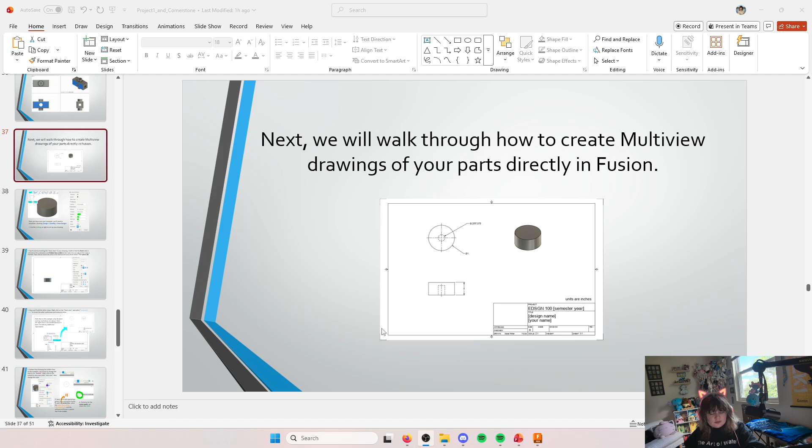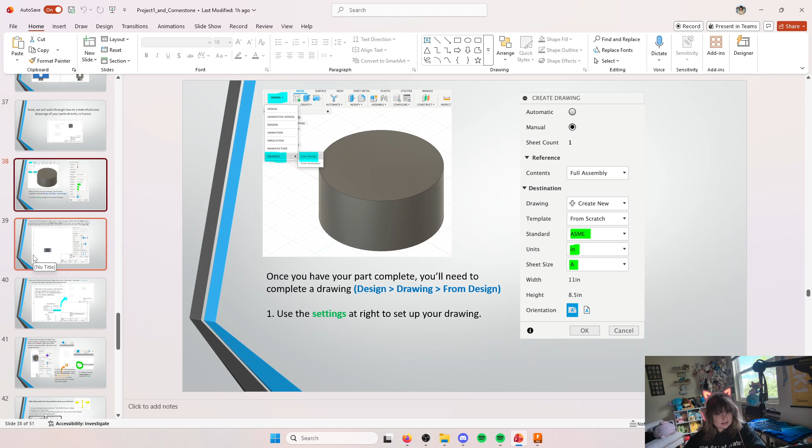Next, let's go ahead and create a Fusion Multiview drawing. You probably learned how to manually do multi-view drawings through actual manual sketching. It's an important skill, but it takes a lot of time. So sometimes instead, we want to use our digital tools to create multi-view drawings. There are slides on this you've likely gone over in class, but this tutorial might still help you revisit it. Let's walk through it.

So we have our object that we created in our original walkthrough, and let's say I want to go ahead and create a drawing of this. We can create the multi-views. We want to see everything. To do that, you want to go over to Design, then Drawing from Design.

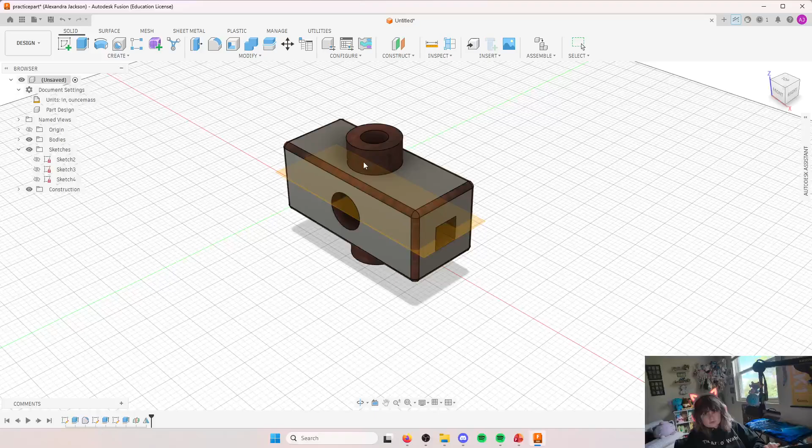First, I have to save it. Let's just go ahead and save it as something, making sure you know where it is too. This menu will come up to create your drawing, where you can double check all your settings. We want to use the ASME standard, and the units you want to use - for me, that's inches. I'm going to change the sheet size to A, just for regular printer paper size, and click OK.

Sometimes it takes about 8 years to load into a drawing, depending on the computer you have. Oh my God, AI assistant, please leave me alone. Please, I'm begging you to leave me alone.

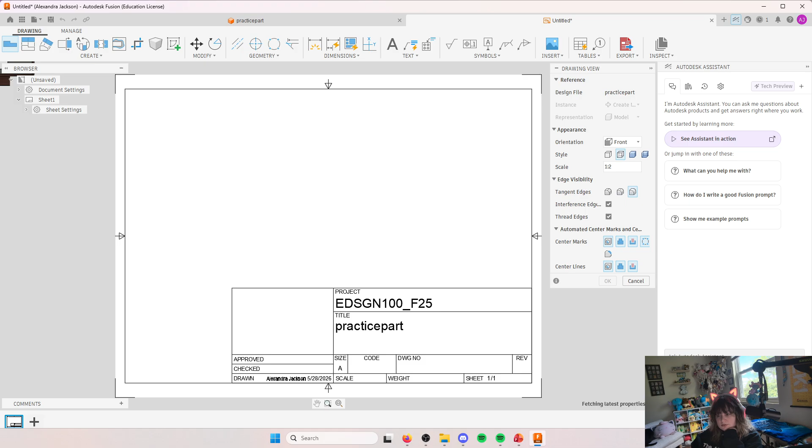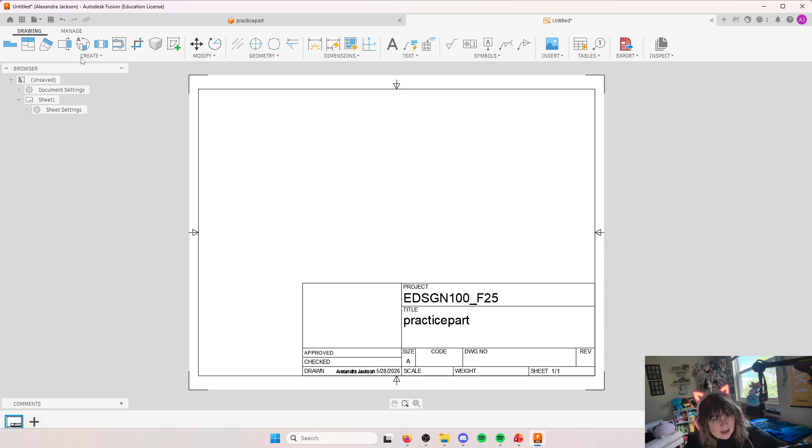Okay, and then it shows you your drawing sheet. Now, because I got angry at the AI assistant, I don't have the actual part attached to my mouse. Usually when you come in, it's already holding the part and you just have to drag it. So we will have to do it manually, but that's okay because everything you need is right here. Create base view - this is going to show us our front side view.

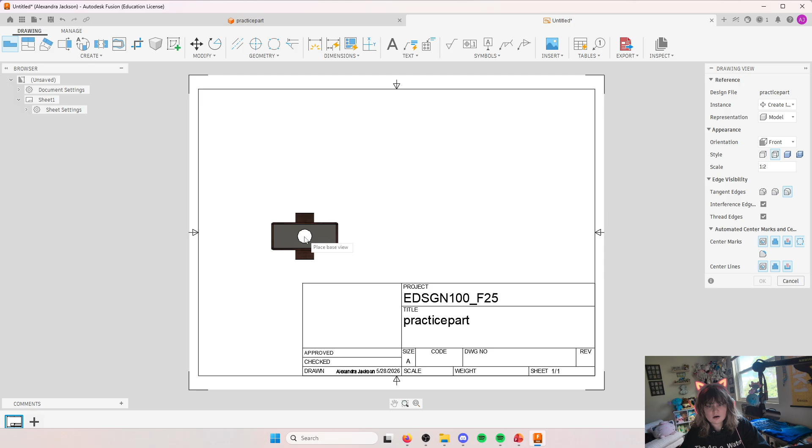So when I have it, I'm not holding the right click or left click down or anything, I'm just dragging it around. And since this is the front view, I want to place it around the bottom right corner-ish - bottom left corner, excuse me. I guess I don't know my left and rights today.

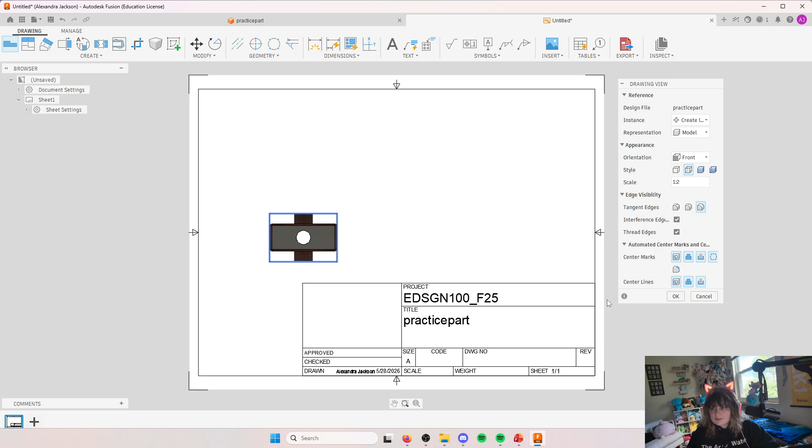In our multi-view drawings, as you remember, our drawings are not shaded. So you want to make sure you are selecting the style you want, with visible and hidden edges. You can select different styles too, but you want to make sure you have that so that when you add dimensions, you can see all the lines, hidden lines, and things. So if we click OK, that's what we see.

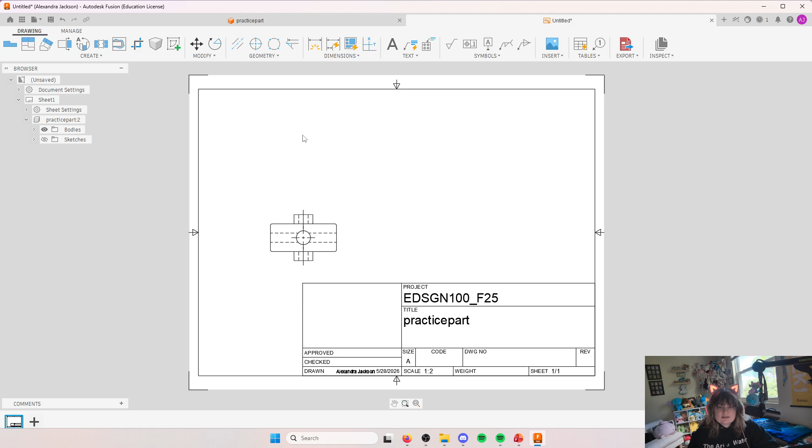We see center marks and lines. Again, if you bring up the drawing view by double clicking, you can select things like center lines, round cuts, whatever you want to see. So it looks great, but now we also need to see the top view and the right side view, as well as our isometric, right? It's important that we see the whole 3-view thing.

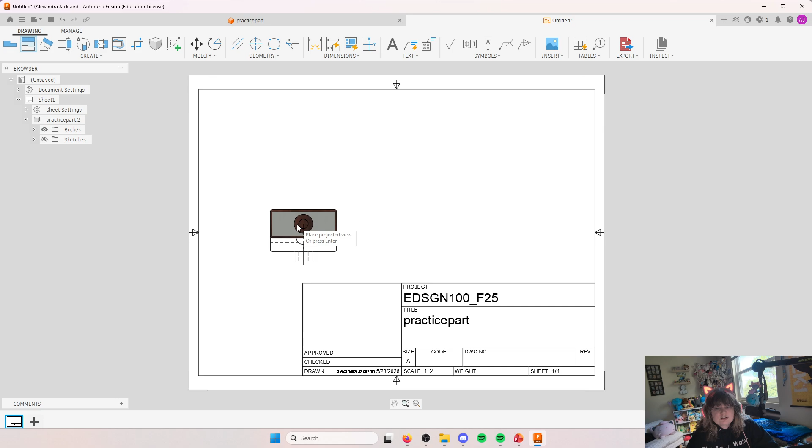If you right click it, you'll see this projected view here, or you can select projected view, or press P on your keyboard. When you press P, you go into projected view - you'll first have to select a parent view, which is your base view. Then as you drag it around, you can place different views. So let's place our right side view, place our isometric view, and place our top view, then click escape or enter, and that will be there.

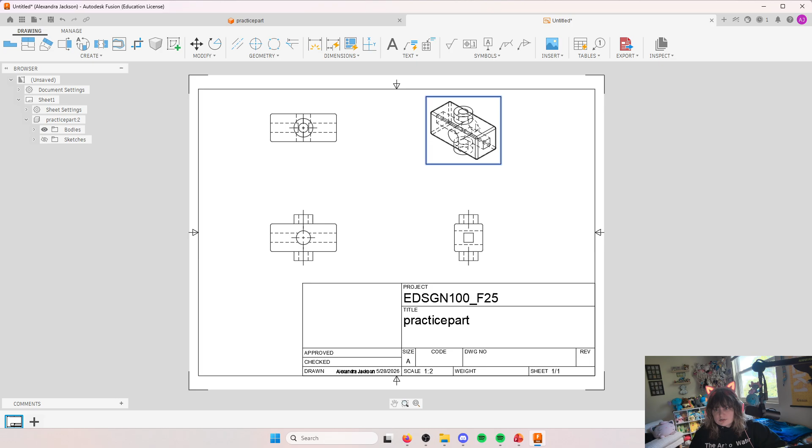So great, now we've got our views. We do want to make sure this one is shaded, because we want our isometric view to be shaded. You can move it however you like, but you do that by double clicking and changing the settings. So perfect, we're in a pretty good spot.

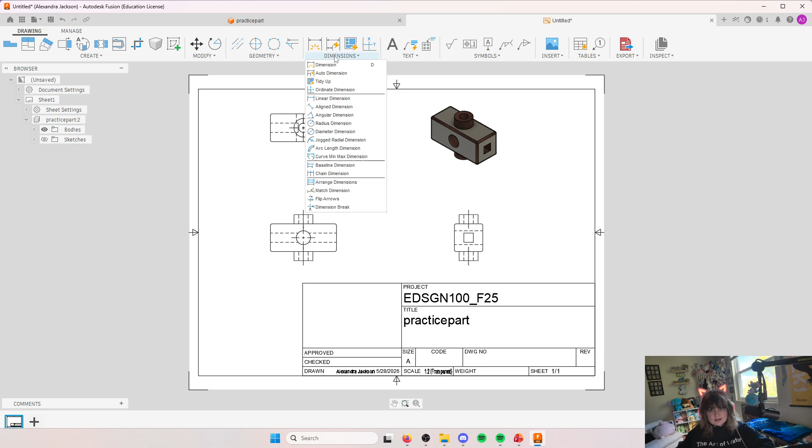Next up, we need to make sure we are adding our dimensions. You can do that manually of course - you've got your dimensions. For more complicated things, and since you're making this from a part that's already well defined, you can use the auto dimension tool. You just have to make sure you're moving things around for them to make sense.

So if we do that here, we can see this 3.5 is down here, and we want it to be in a different spot, so let's move that up. Let's move this over here. Let's move this - fillet radius, that's what that is. Move that over here.

We've got our 0.5, 0.1, our radius again. Here, this is 1.5. Okay, great. So we've got what we need in terms of our dimensions.

This looks good. Now we're missing a couple things. Remember, we want to make sure we have lines for these holes that go through. And we do, this is showing that we have a line here, and we have a line here. We've got lines for our circles.

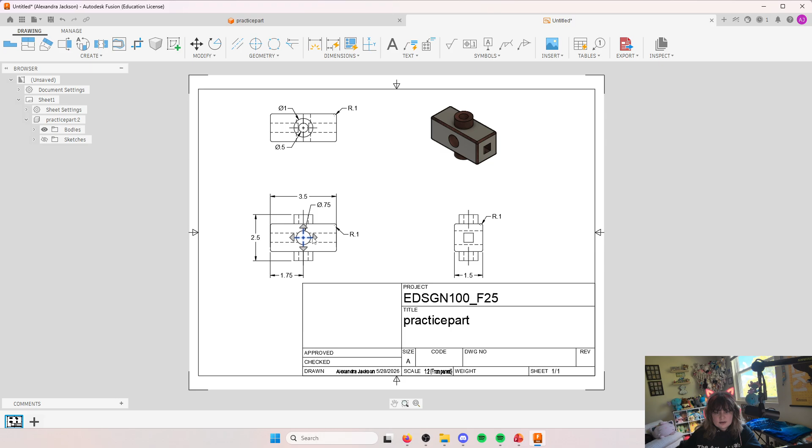But the proper notation of these lines is like dotted lines, and these are solid lines.

This is just an annoying thing that can happen with smaller looking things. You can actually do that in document settings and change your line width group, and just play with your line type scale, make it a little bit smaller. I just kind of guessed here, like 0.5 seems to have worked pretty well for this line and this bottom line here, as well as over here.

Looks good. If you needed to add more, let's go ahead and go for a center line. We want a center line here, for example. We want one here, and maybe we want one here. I don't think we actually do, but let's just add them for the sake of adding them so I can show you how the feature works.

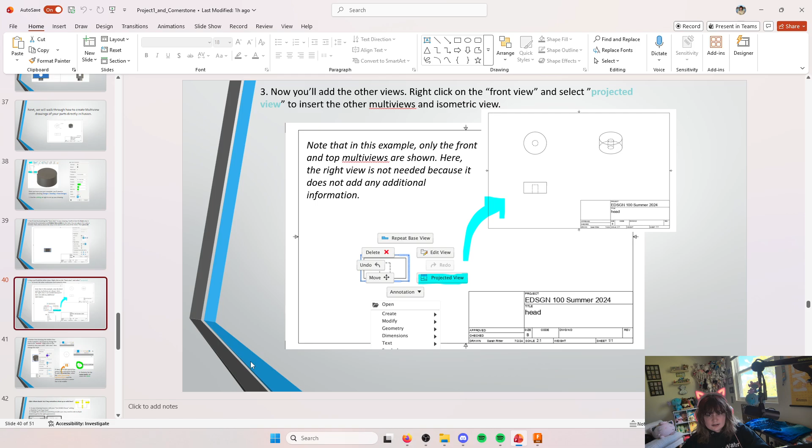But there you go. So once you've got all of your features added, let's make sure I've covered everything here with line type scale. All right, we've also got this depth feature.

On the top view here, we know that there is a depth that this comes out, and we can figure out the distance between here and here because we have this distance. But we also have to note that it's a depth. It's not a complete hole through the center. It's a depth that only goes in a certain amount.

I think it was 0.5 inches. You'd have to double check. But there is a way to create a depth symbol.

What you want to do is you can just create it right here in the diameter dimension, which only this 0.5 one is going in. But if you double click that dimension and go in over here where it says insert symbol, you can add that depth symbol and add that it's 0.25 inches.

Now we know that this part, like this middle circle here, is 0.5 inches in diameter, but it also goes in 0.25 inches, or whatever it was. I think it was actually 0.5. You'd have to double check.

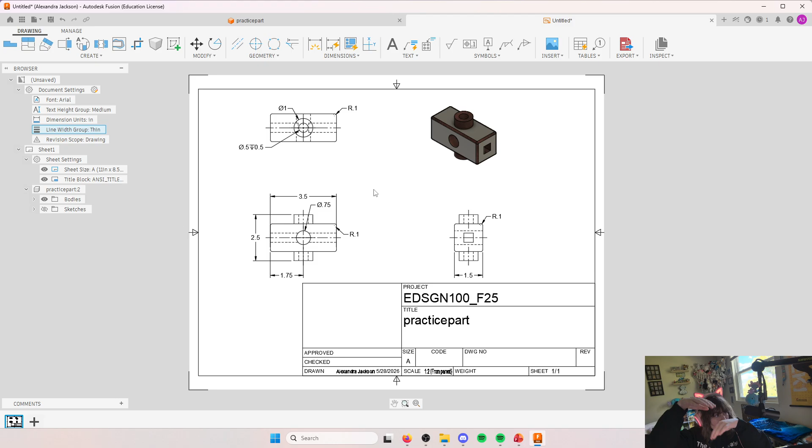So, is it? Yeah, if this is 2.5 and this is 1.5, yeah, it's 0.5 inches. So this just specifies here that this is a depth. It's going in something, there's a depth to this dimension that we have. And since it's mirrored on the bottom, it's inferred that that is the case.

So when we've got everything done, this is shaded, all of our lines are included, all of our dimensions are included. We next have to make sure that we've got our titles correct.

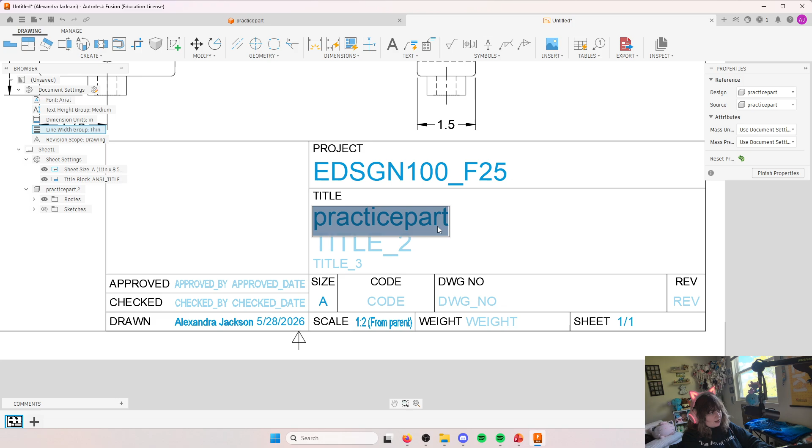If you double click on here, you can change the title of this. Part drawing, maybe. You want to make sure that it has your name on it and everything. You don't need to worry about most of this stuff, but you want to make sure that it's correctly titled.

And then, notice that all of these dimensions make sense to us, but if you gave this to somebody, they wouldn't know what units it's in. So it's important that we add a box somewhere that tells us what the units are.

So I'm going to go ahead and add a text box. There's just a text feature up here. I'm going to add a little text box that tells us that our units are in inches. And now we are done with our drawing. Just make sure I didn't miss anything here.

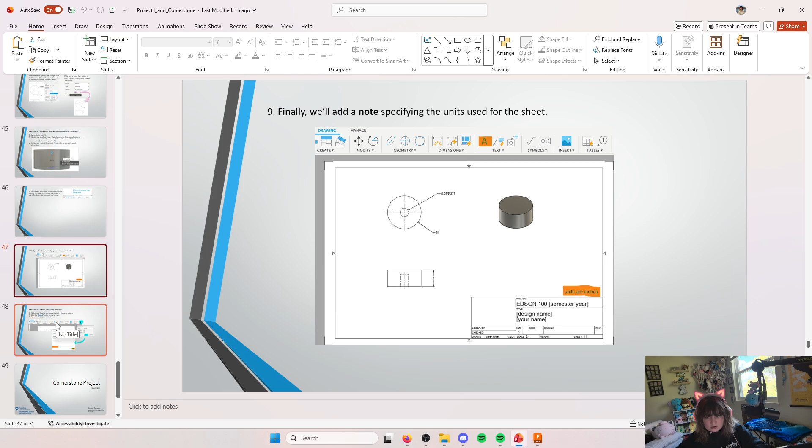Great, last step is going to be, we want to save this drawing. And there is an export button here. You can export this as a PDF. I'm going to want to export all sheets.

I am going to actually open it just so that you can see what it ends up turning out to be like. PDF of part drawing.

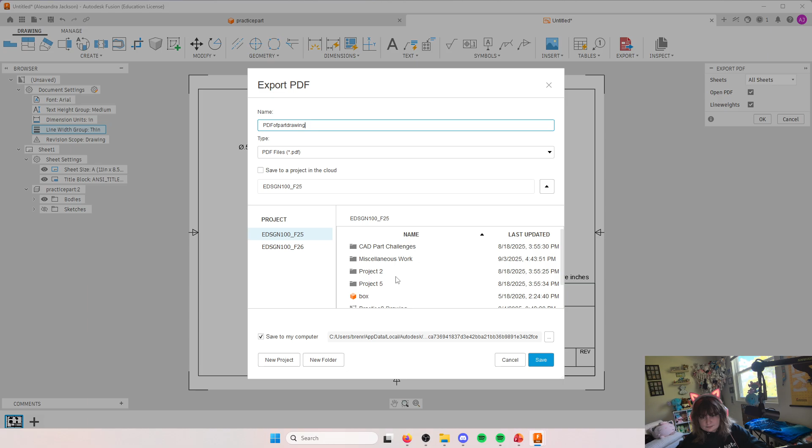And then you make sure you want to save it to a spot that makes sense. Save to my computer down here. You could specify where that is. Let's just save it here. There we go. And then it will go ahead and open the PDF.

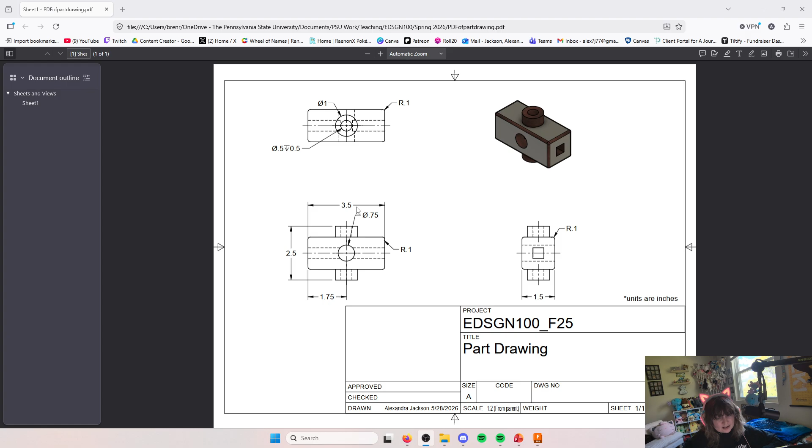And there it is. Perfect. That's what it looks like. It's really important that you make sure that you save things in a way that makes sense, and in locations that you can find, because it's really easy to lose stuff. But yeah, there you go. That is how to create a simple drawing.